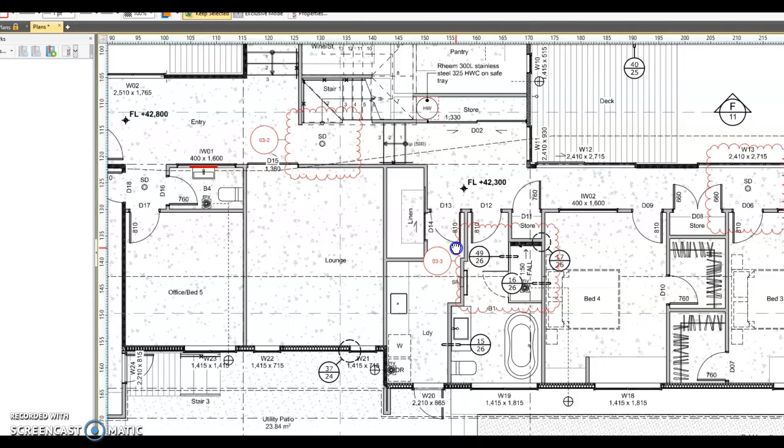Moving over to the kitchen, possibly the kitchen splashback - whatever space, because this is an old drawing, whatever space between the kitchen bench and the underside of the cabinetry would be the kitchen splashback. That's pretty much a given if you are going to do it in tiles or a glass splashback or some other material. But that's if you were tiling, that's where that would go.

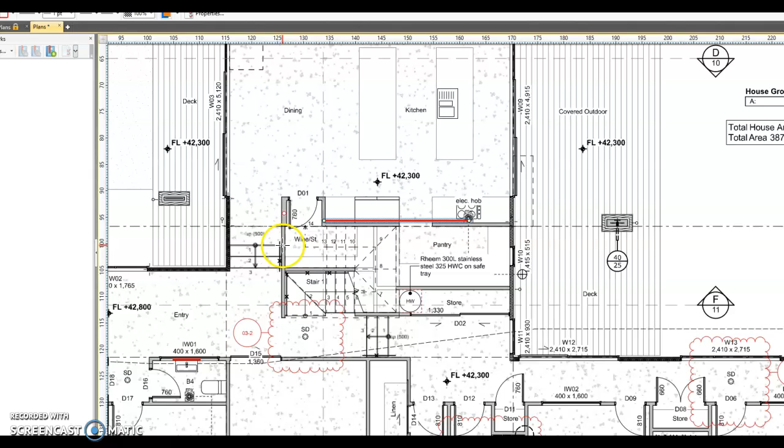The laundry, again, I would say would just be the wall splashback - from the bench up to the underside of any overhead storage. If you don't have any overhead storage, it might just be a small splashback, so probably just look at what tiles you would like for that space. So you've got the kitchen splashback, the laundry splashback, and a tiny splashback above the vanity. Just start having a look at that.

Now, the bathroom - you would always do this whole entire wall. I would probably do this whole entire wall, floor to ceiling, rather than just the shower area. It often looks pretty good. Then you either have to have a splashback above the vanity as option one, or option two would be that you just do the whole entire wall through there. So you've basically got this and this happening, and you leave the window wall.

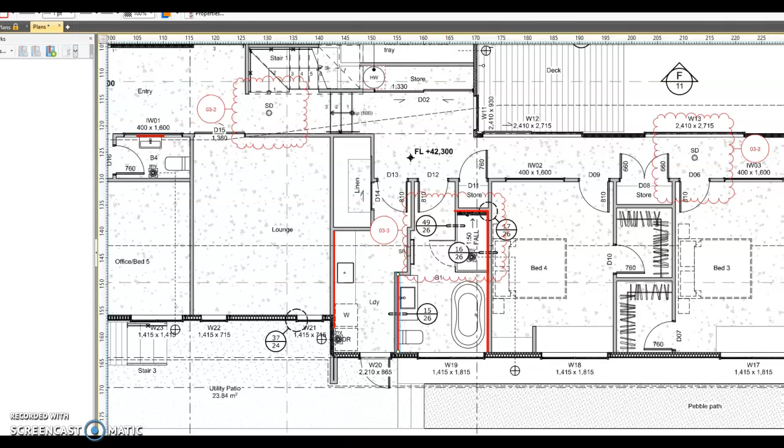Pretty easy. Isla's room, you would do the whole shower enclosure as a minimum - obviously you'd tile all up in there. Then what I would probably do, just because you are going to be walking in from this direction, I would actually tile this whole wall. It would just be a much neater transition as you come in. That whole space is tiled, and then it's again the whole principle - do you just do a small section above the vanity as a splashback, or do you actually just tile the whole entire room, the whole entire wall, just leaving that wall?

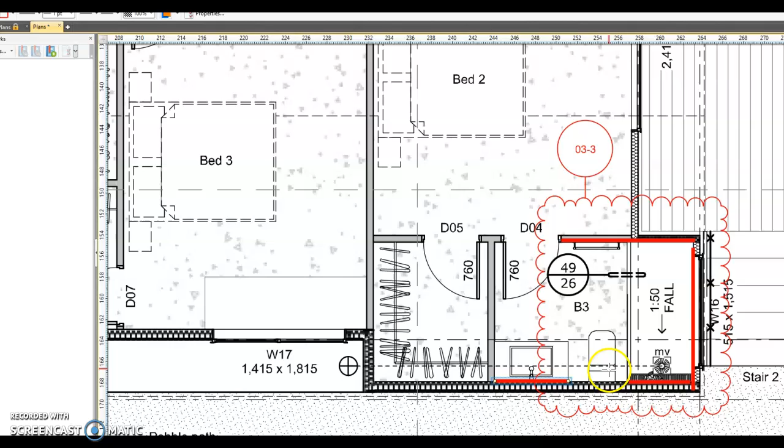So those are your kind of options on that ground floor. Really, look at what type of tiles you like, and then it's the size of the tiles and the location of the tiles.

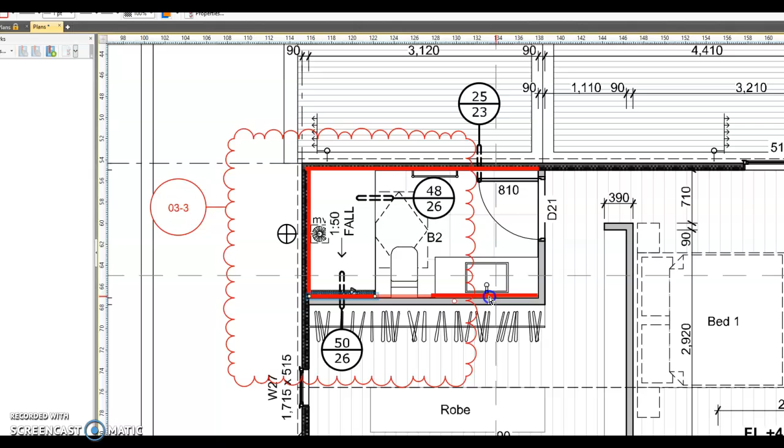Upstairs, obviously the floor gets done, and again it's the option of shower as a minimum. I would do this whole entire wall because you need to do that part for the window that you're possibly going to be putting in. You can either stop the tiles there, but just because you will get a bit of water there, I'd probably run the tiles all the way through there, and again just do a small splashback above the vanity, or you fully tile this whole entire back wall floor to ceiling. So yeah, that's probably the only tiled areas.

Have a good think about that, run it past the old interior designers, and just let me know what your thoughts are.